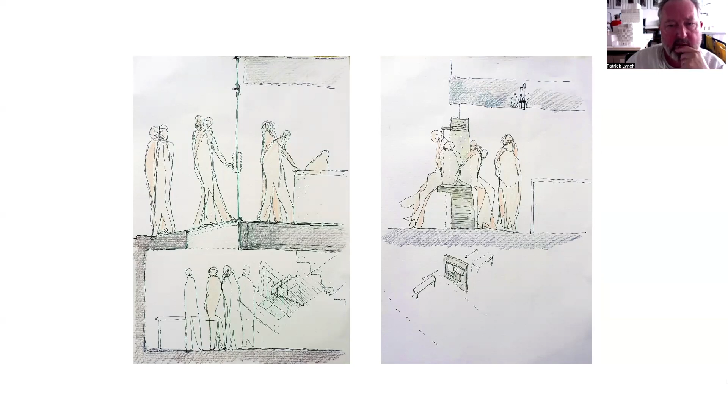So this is an example really of what the studio's like on any given day. A drawing of somebody sat in a niche in a wall with the evening sun coming in through the windows facing west, overlooking Christchurch, Spitalfields, a very early project, and the sound of the bells. And so the situated bodily character of this small gesture within the architecture was paramount early on. It's a drawing done much later. The project was built in 1999, I think. These two drawings also were done for the book Mimesis to illustrate a working method.

I think before the digital world, we didn't always scan things, and things were kind of stored away in boxes. On the left, a conversion of a Victorian warehouse building into a lawyer's office with a glass pavement illuminating a small meeting room in the old coal cellar. And on the right, another intervention into a warehouse building, both in Clerkenwell. I'm going to show you these two projects quickly.

Bristol Street, our first built project, I guess, that had a public face, is in the centre of the image you're looking at. Sat in between a Grade 2 listed Georgian house and listed Victorian workshops, in essence, the subdivision of this glass screen into three pieces echoes in a mimetic fashion, if you will, the scale and proportion of the domestic architecture either side of it, probably more like the Georgian than the Victorian.

And then the introduction of etched glass on the pavement, which folds and forms a kind of stall riser or ghost of a window ledge, introduces a rhythm and a scale which otherwise isn't required and could be all one piece of glass, but I think it transcends a technical problem and instead introduces a human dimension. And so the building is a kind of ghost or an echo of the Victorian and Georgian architecture.

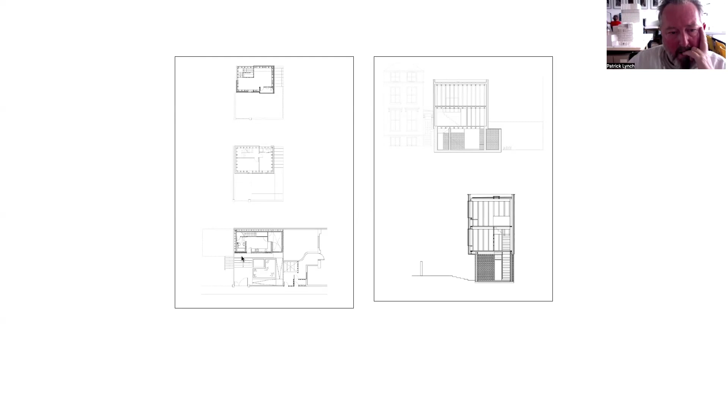The way we did it was to excavate slightly. You come in here, or there's a ramp down, to a brick ground, new white bricks and bricks painted white externally, on which sits an oak balloon frame, which was the client's desire.

They wanted a green oak frame, wanted something absolutely ancient, and effectively plywood used again to achieve this cantilever to get just enough space at first floor for two bedrooms and a shower room. The living room is situated on the top floor, the double height space here, and the balcony.

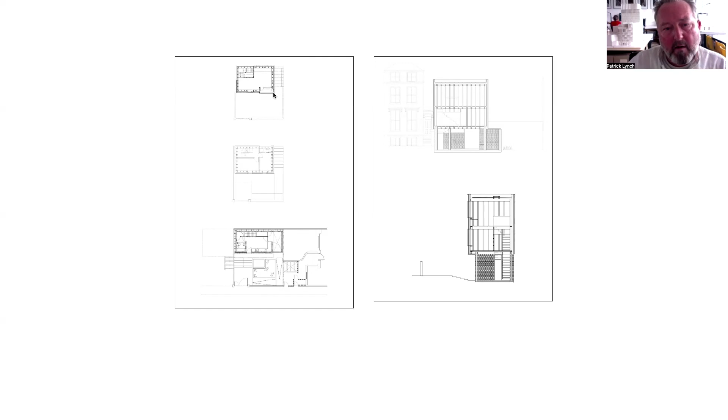It has this curious effect of, if you like, kind of ending the street in a way which the blank gables of the Victorian houses typically of London don't. They abut each other. And we were, I guess, keen to make a connection between the bodily scale of the 60 centimetres of the structural grid internally and the glazing, and the civic scale, so that the building is making a contribution to the street scene. It was all clad in vertical oak, a rain screen, effectively, where the boarding is.

It's weathered here. The windows don't open, so we avoid the kind of style issue of looky-likey Georgian or Victorian glass, but there's a ventilation panel. This is the kind of bricky lower floor, which is a heavily planted garden. And then as you rise up into the timber aspects of the house, the oak frame is complemented by, I think it's oak veneered MDF wall linings. And you start to see that this is the oak frame.

It's green oak frame, so it's not seasoned, which means it's highly reactive to the seasons, to the amount of moisture in the air. It's all held together with these things called tree nails. I like this picture because it shows there is depth, and there is an echo again of not just the typology but also the detail of the neighbouring buildings. There's views up at certain points. The back facade is etched glass to do with issues of visual amenity, i.e. privacy of the neighbours.

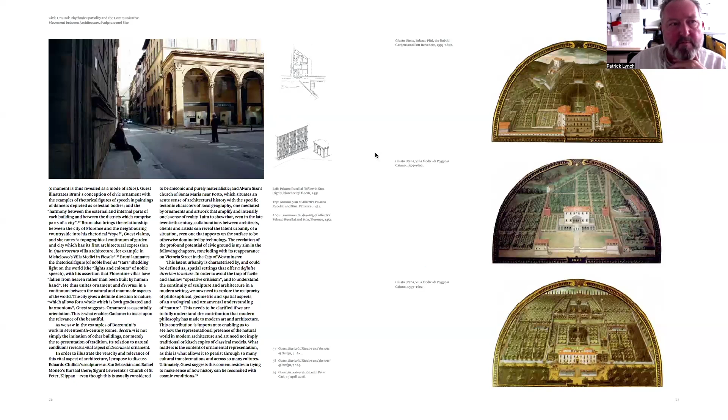And these are pages from Civic Ground, the PhD, and in essence, what Alberti said was that a really important thing that an architect can do is teach his client virtue, and that virtue, which is the moral philosophy, if you like, underlying design decisions, in this case meant persuading the client to buy a piece of land, to build a structure to provide shelter for people and for artisans, and for them to then watch the procession as it went past, was as important as completing the building for themselves.

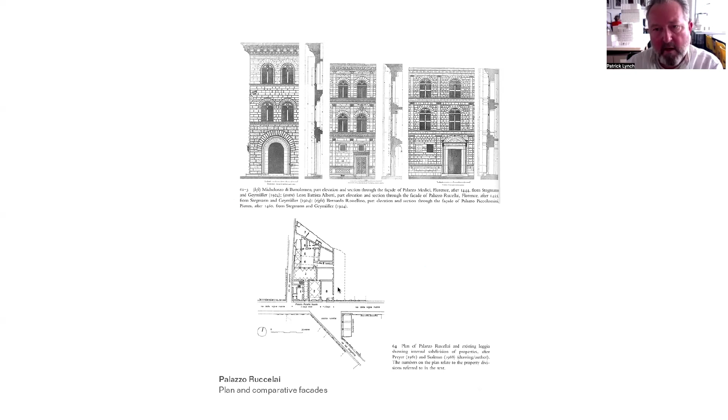And in fact, it's not complete. They didn't manage to buy this plot of land, and so the elevation isn't complete. But the way in which the building is able to participate in the city, nonetheless, was fulfilled.

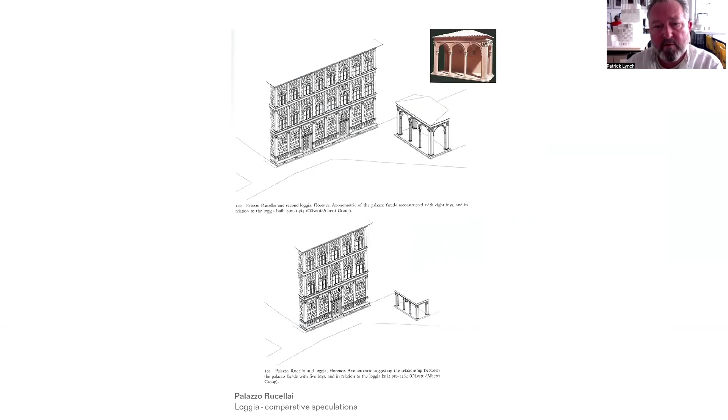And the particular festival that was being celebrated was the feast of Bacchus and Ariadne, where Ariadne, who's kind of left behind by Theseus, was taken up as a symbol of the proletariat of the city, as somebody who gets consolation in wine and song because they're brokenhearted.

So the building of the loggia was a way for the wealthy family to acknowledge their reliance upon the city to provide them with their well-being, and the need for them to recognise the presence of organised popular culture. That's in one way highly esoteric, but in essence, I suppose the message, Joseph would argue, I think, is that public space is as important as architecture, and specifically in the domestic sphere.

And one of the most recent things that we published is this book about Neave Brown, who famously said when he won the RIBA Gold Medal, we didn't think we were doing housing, we thought we were just making part of a city. And in the book Part of a City, which I wrote with David Porter, Neave Brown's ex-colleague, as you can see, we start with the Rykwert quote. I was trying to talk about the contribution that Brown had made,

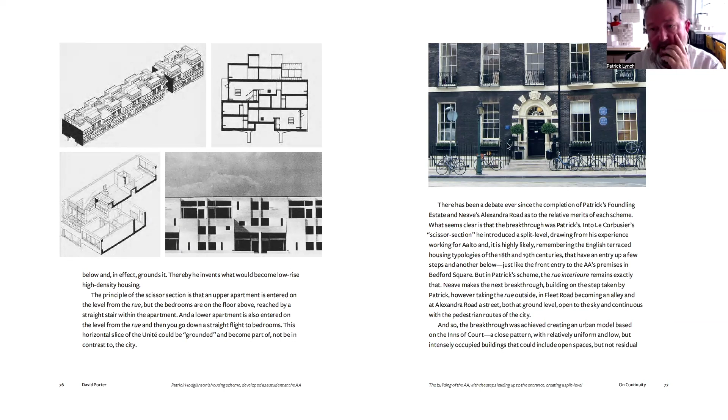And then those ideas evolved into the Foundling Estate or the Brunswick Centre in Bloomsbury, which were inspired by this 4th year project by Hodgkinson and by their own experience of Georgian architecture, i.e. being students in Bedford Square. And Neave Brown, interestingly, worked for Camden Council, but he was also allowed to teach. He was teaching at Princeton and at Cornell with Colin Rowe and others, and writing a lot. He was a very prolific and very good architecture critic.

And he, for example, thought that Lewis Mumford's distaste for the Georgian was kind of weird. Why should the fronts and the backs of buildings be the same? What is that duplicitous? And in essence, the early projects that Neave Brown began to build for himself and the Hopkins and their friends, this row of concrete, effectively party wall houses in Winscombe Street in Camden, has a kind of mixture of discrete elements. Either the ground floor can be accessed directly from the street, can be rented out, or teenage children can be there. But the garden is communal at the back. So there's a kind of anonymity.

And Brown was influenced by Atelier 5, the Halen housing. So there's, I suppose Sandy Wilson would call it the other tradition. There was an emerging typological reference to pre-existing patterns of habitation, both in terms of dwelling and architecture, but also in terms of the relationship between private space, semi-private space, semi-public space, and public space, that informed then Alexandra Road,

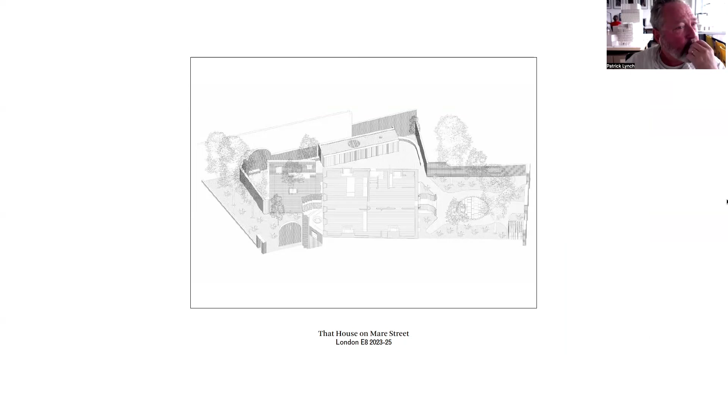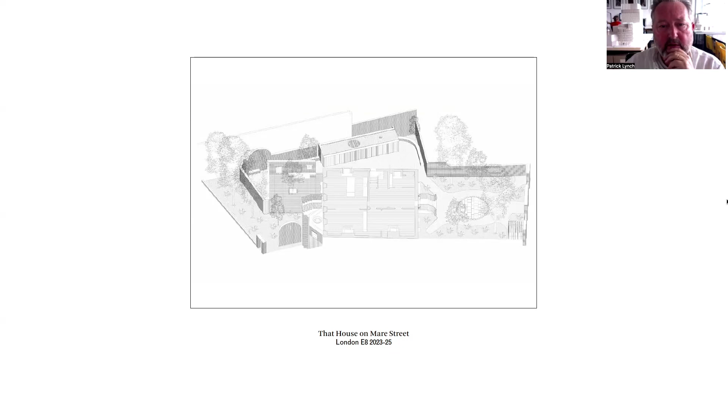Anyway, so the structure of what I'm going to talk to you about now is evolving this domestic architecture. There's a house which is still on site on Mare Street in Hackney. Our interventions, working with Jo Bernstein, the landscape designer, have been a series of gardens and furniture items in the gardens and in the house. The house used to extend to the depth of the plot, but this is London Fields, this is Mare Street, it's north, south. It was built in 1697 for a Flemish merchant.

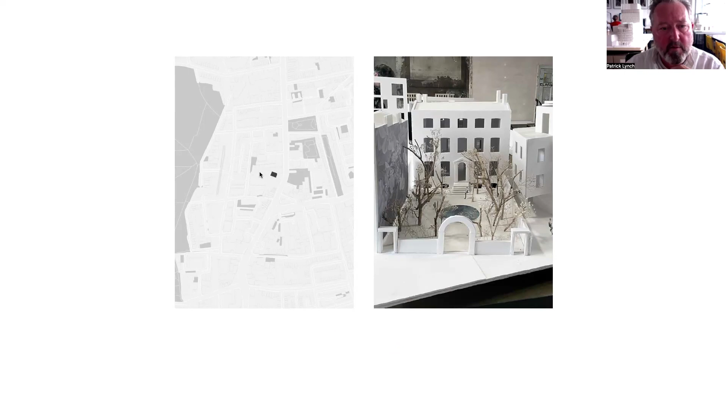It's a cube in plan and in section, and it has a square garden in front of it. Recently, a developer bought it, turned it into an office, and thus got consent to build housing very close to it in the rear. And therefore, our task has been to try and mediate between the overlooking issues of the new apartments and our client, who are a couple with a family, 3 children.

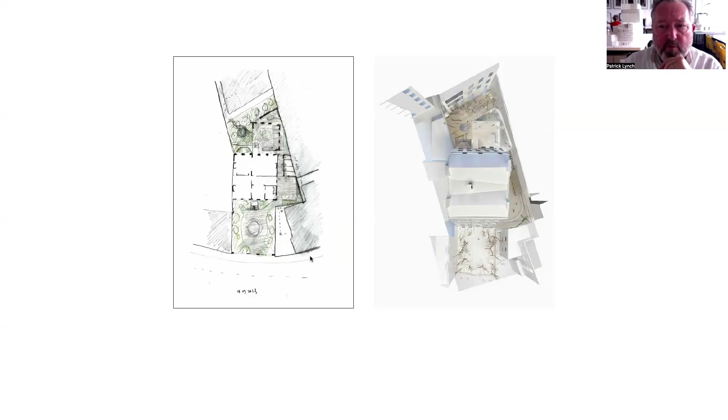The brief includes an art centre in the lower ground floor, and so a very formal garden at the front for those activities to spill out into festivals, performances, etc. And then a much more intimate garden at the rear. And in essence, what we've done is create a kind of fictional recreation of ruins of things that we know were there.

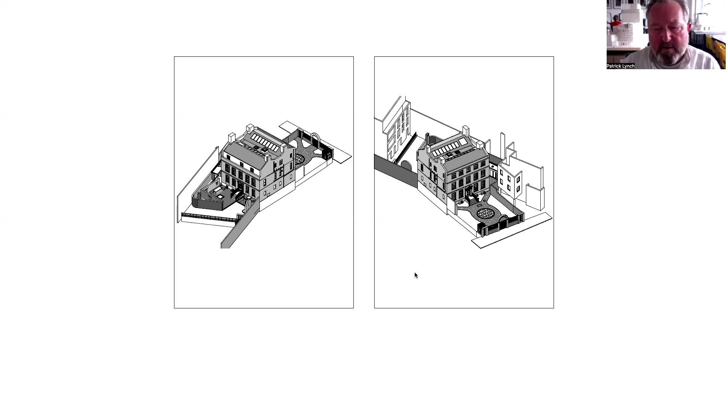So at various points, the house had operated as a working men's club, before that as a women's refuge. Elizabeth Fry operated out of this building. And so we know that there were washhouses and rooms where people were learning to become domestic servants. And so we've created a kind of fictive narrative of ruins of those elements in the garden.

And then in the house, tried to do very, very little to the existing fabric. So there's a mixture of new elements placed in and managed deterioration, I guess, or kind of ruined character. We've introduced a new staircase in the position where historical research suggests there was a second staircase, and new timber panelling, which allows a kind of enfilade plan to occur. So you can close down these rooms.

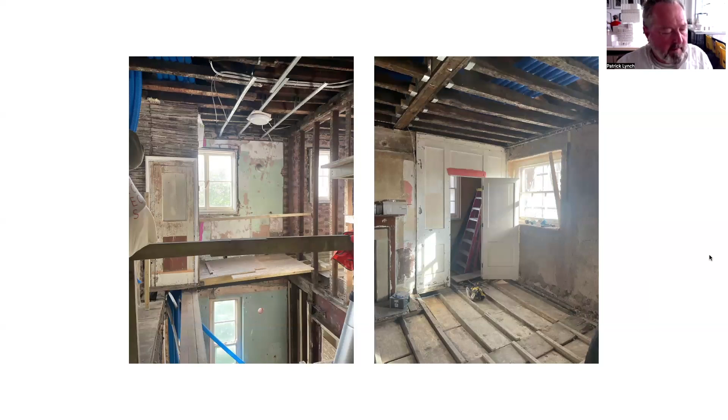This is a music room looking onto the second stair in the hallway. Beyond is a kitchen, dining, living room, and then at first floor, master bedroom and a living room. So that the house can both operate as a kind of an intimate space, but also as for public use. By which I mean where the art centre and the extremely gregarious character of our clients kind of allow the building to have both an intimate bodily scale and a kind of worldly connection.

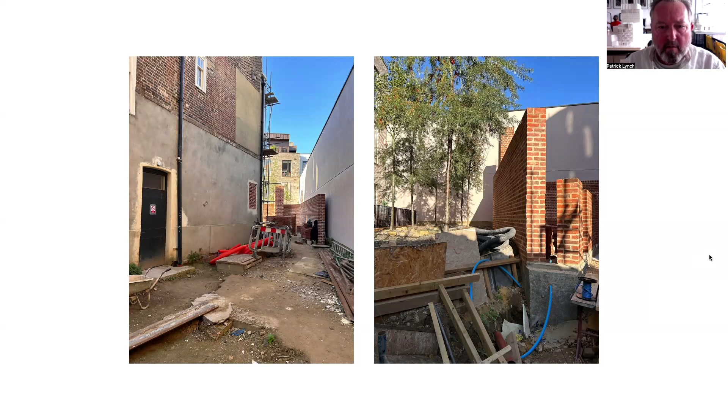The brick walls at the back are, they're kind of fictive. They're kind of ruins. Their purpose is to, along with the very tall trees that we planted, disguise the neighbours, but also to create an intense sense of intimacy. So when you sit within the thickness of the walls on a bench and look south, you're conscious of this oak tree in the neighbour's garden, and there's water coming in to the pond, and there's a chimney, a barbecue.

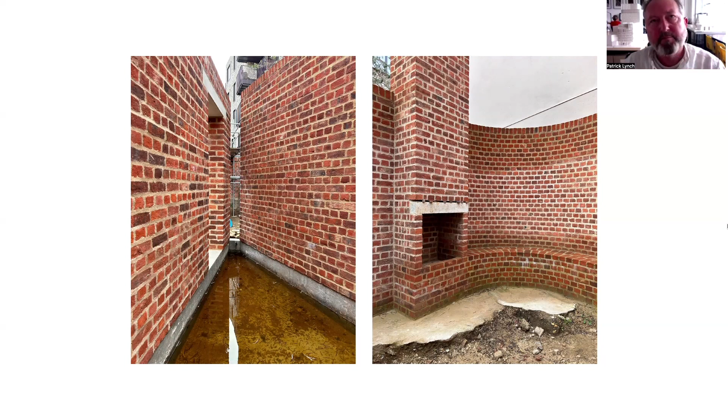So it's extremely elemental architecture and very bodily, and an attempt to introduce a kind of new layer, by which I mean, you can do the experiment now in the room you're in. If you look at your finger, you can't look at the screen. If you look at the windows or whatever's on your windowsill, you can't focus on anything outside your window. The camera can, but the human eye can't.

So if you place things into the foreground of people's vision, they aren't aware of the background. The background becomes background. Disappears, blurs, and thus you have an intense intimacy, which allows you to be cheek by jowl with the rest of the city.

I think there's also something going on about figurative elements in architecture, by which I mean chimneys and things that are kind of bodily, but also have a kind of linguistic content, whereby the eye recognises that even if you're not having a barbecue, the chimney gives it the character of a place. So it's not just a garden. It's not just to do with scale as size. It has to do with the intensity of one's experience of something and how the mind reads it as a place for potential inhabitation and occupation.

These are photographs by our son, Valentine, who's about to start studying architecture. And the project is a kind of, I guess, a sort of unity of the arts, a kind of Baroque project whereby the garden that Joe Bernstein is planting is complemented by this wonderful mural by Thiago Mazza, which is moving back and forth from plant species that Joe's planting in the garden, plant species that historically would have been in the garden, and

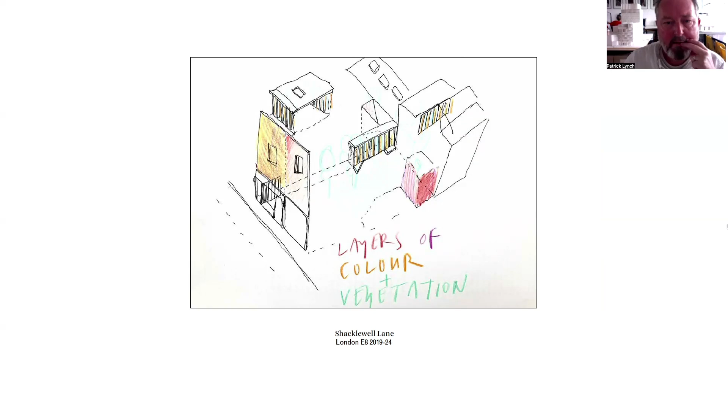Another project, which is similarly kind of hybrid between domestic and civic, if you like, is a project not that far away, also in Hackney and Dalston. Shacklewell Lane has a green on it, which historically was used for livestock, for grazing cattle, and our clients bought the property in the late 90s, and it previously had been a dairy and a milking parlour and a shop, and the building next door was a butcher's.

So it's quite a deep site. This was the milking parlour, this was the dairy, and this was a shop, and there's a small courtyard. And they, over the years, got married, had kids, but were kind of schlepping back and forth in their pajamas and slippers. There's no connection between the animal architecture at the rear, if you will, and the domestic at the front. And there was this courtyard which was effectively formed by the shape of cows moving through, a small recording studio, and

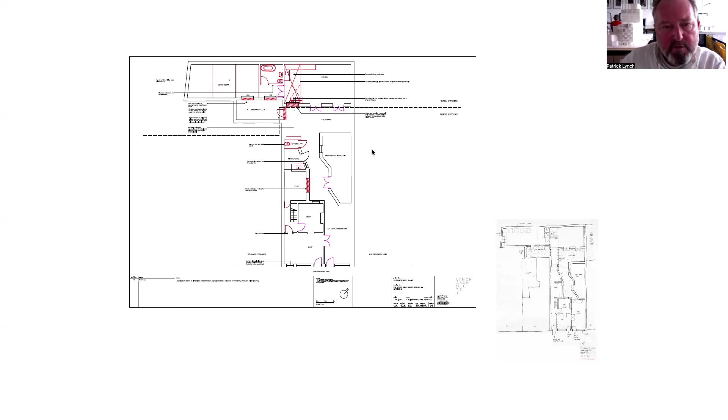what we proposed to do was to remove the roof over this space and introduce some windows, thus creating a new courtyard, remove some ad hoc amendments that had been added at some points over the last decades, and remove this external WC, and then just build this much new construction, 5 square meters, I think, of a glass corridor link connecting the front to the back for the first time.

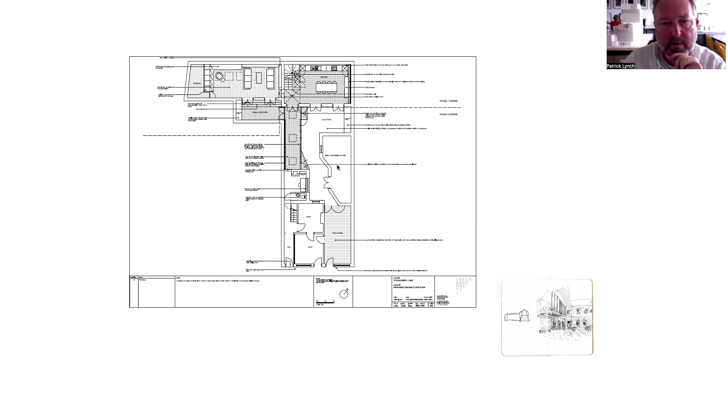This steps, because historically there would be quite a lot of effluents and spilt milk and stuff that needed to be cleaned, and so the whole site effectively is stepping down to drainage here, which effectively gives us a kind of motif of a stepping ground. There's a shop, the client sells furniture, and a yoga studio. So the domestic entrance is here. Upstairs is 3 bedrooms, and then we process through the last corridor to the living room and the kitchen, and then above here there's another bedroom, and the music recording studio remains, and a new courtyard.

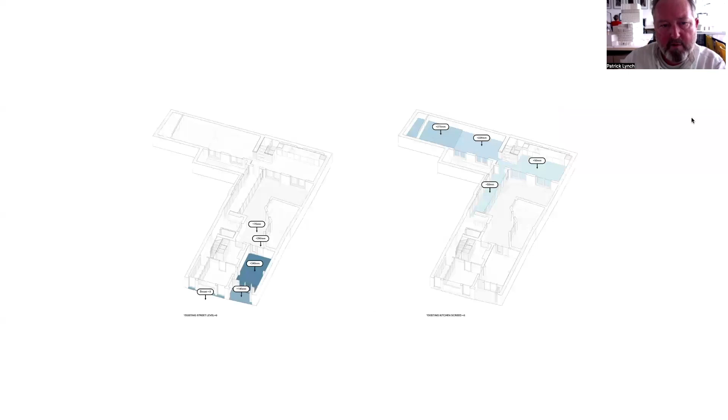hardwood timber elements. The axo shows how the ground is stepping, and the idea was to try to do something that signified its new use, its new identity, that was sympathetic to the earth tones of the neighbouring buildings, the ubiquitous brick of London, and to introduce new timber elements, a screen that opens to allow the yoga studio to be accessed. This is the door to the shop, and this is the door to the flat. New windows, again, fixed panel with an opening vent to the side, which avoids stylistic questions of Georgian or Victorian.

And then as you move through the house, the introduction of a new ground made of terrazzo, which is similar to the cobbles in the courtyard, I think, fair to say, but it's a sophisticated environmental device, underfloor heating, there's lots and lots of insulation. So there's a kind of material continuity between inside and out. It's a slightly wider corridor, creating a gallery space. A new stair up to the first floor bedroom above the kitchen.

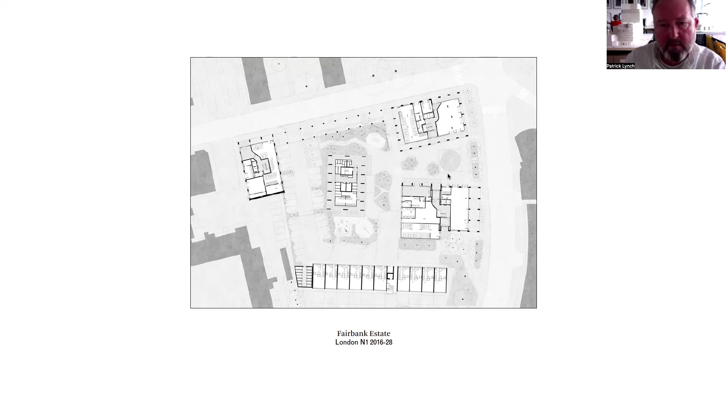One assumed that it was bombing that had led to the destruction of large parts of Victorian domestic streetscape, but actually it wasn't. It was the planners. They decided to get rid of what would now be listed housing stock, and to build a tower, to create a sunken basement level, literally, the road engineers are in charge, and a 3-story car park structure to the street.

There's a car park between you and the tower, and in fact, the car park structure, in order to ventilate it, literally creates a rift between the existing streetscape and the site, which is further elaborated upon by the creation of a kind of shallow bridge that further isolates the tower in a moat of cars and road engineering.

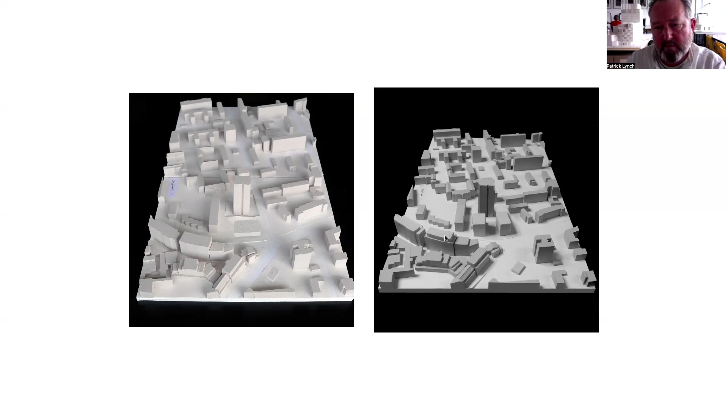Our solution has been to create 3 new blocks, which are parallel to Murray Grove here, and in this case perpendicular to East Road and New North Road. The result being a kind of natural perspective, focusing on, for the first time, the entrance to the existing tower building, and a building here which accompanies a 90s building here, creating a new route into this estate.

This is Hoxton Street here, so if you're coming from Hoxton Street, that's the main entrance to the site. If you're coming from Old Street, there's an approach from the south. This block is fully social rent. This is fully market, and this is intermediate housing.

Yeah, it's, I suppose, modest, anonymous background architecture in the way in which Neave Brown was attempting to make, in his words, a kind of civic anonymity. The architecture is, what's the word I'm looking for? Economic, modest. Everybody has corner balconies. This is the west building to the back of the existing tower. That's the approach I mentioned into the estate.

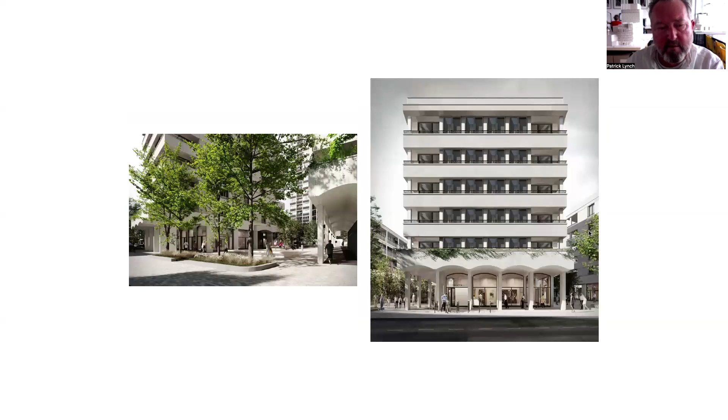But the delight, I guess, comes from the integration and the introduction of a new civic ground. So in complete and utter contrast to the car-infested antisocial territory that exists currently, a series of colonnades and porticos which create layers of occupation both within the facade and within the groundscape. It's a stage, lots of planting. There will be retail use at ground floor.

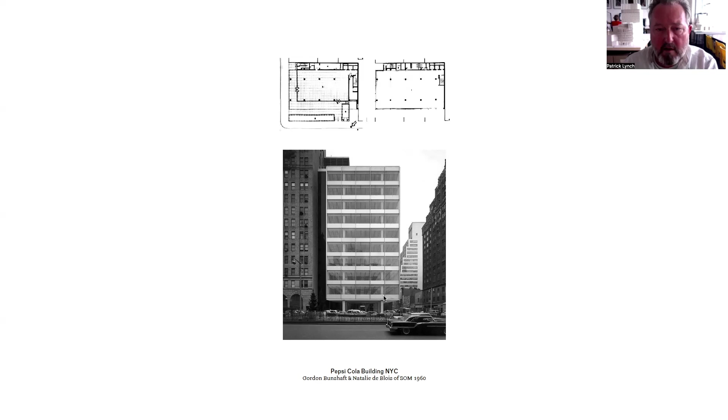It has an open corner, which is here, so you can move through the plan at ground floor. Has incredible elegance and simplicity, which comes alive at night. I would argue very, very urbane architecture, totally suited to its purpose and to its place.

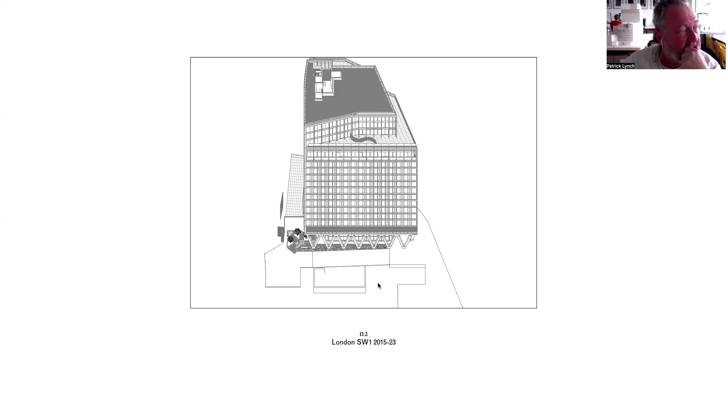It's subsequently been extended. And the reason I'm mentioning that is because what we've ended up doing, which is, I suppose, inevitable if you're an architect in London, which is a city made of, like most cities, of offices and housing. Been working for almost 20 years on Victoria Street, doing a series of office buildings and apartment buildings, which I'm going to show you now.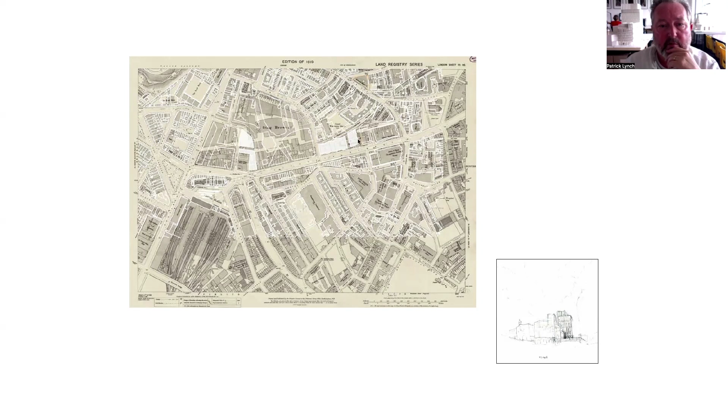And hopefully the theme of the worldly body is clear in the way in which the architecture responds to the setting of the train station, the Catholic cathedral, the town hall, in a way that seeks to ground these new buildings that we've created into a historical streetscape in the way in which some of the other buildings that were built in the 20th century and preceding us haven't sought to ground the architecture in a public realm, and also which lack a bodily scale.

This is N2, this is N3, this is the building called the Zig Zag building, and this is Kingsgate. They were finished about a decade ago. Previously, there had been fragments of historic housing, all of which was demolished in order to build a new ticket hall for the Victoria line, so that you don't have to exit the tube through the train station. You can now exit on the north side of Victoria Street.

A very, very tall tower built in the 60s, if you like, completely out of scale with the streetscape. And our task, in essence, was to try to, I think, in a positive and creative way, critique the problems of this modernist landscape. This building here is cheek by jowl with Hawksmoor's new facade to Westminster Abbey.

This is a photograph that David Grandorge took for us as part of our entrance to the Venice Biennale in 2012, when the building was just going on site. Kingsgate 6 was just going on site, looking at the rich hinterland of Victorian architecture and the rather mute and barren foreground of the street.

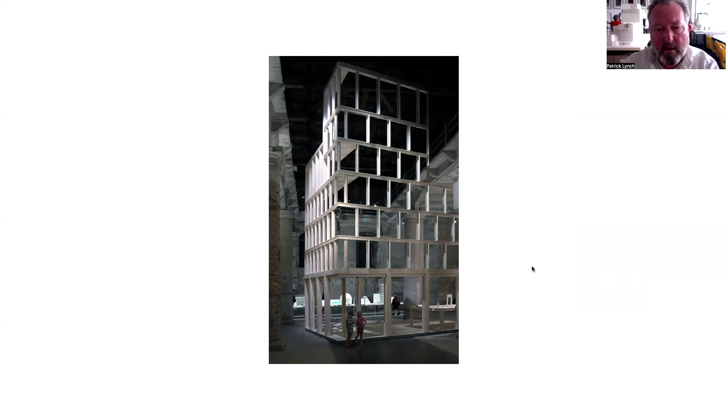This is the contribution that we made. We got a 1/3 scale facade out of CLT in the Corderia of the Arsenale, exhibited alongside Hopkins and Eric Parry. That's the facade that we built 1/3 scale. We started off getting this site, no, actually this site through competition, and then this site, and then these buildings, and then this building, and this, the first one we got planning consent for, weirdly, is going to be the last one to be built.

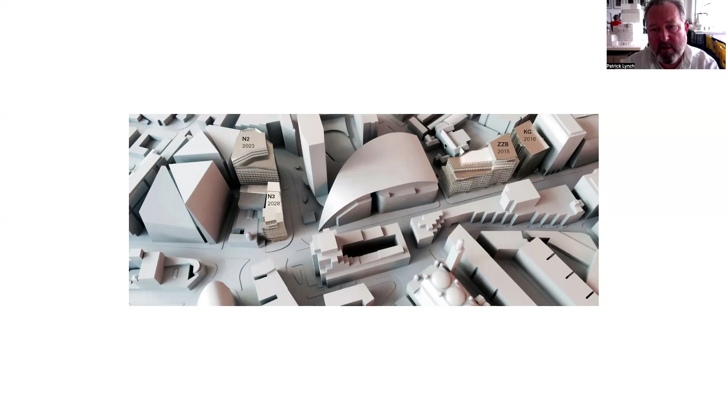There's a new pedestrian route introduced that runs along the back of Victoria Street, so there's a kind of quiet zone, as well as, I suppose, an intensified, I would argue, civic presence to the foreground. This is City Hall. This is Bentley's Roman Catholic Cathedral. Originally, this composition of the town hall had two wings like this, completely blocking progress north-south, creating a service zone for cars at the back and a very bleak pedestrian experience at the front.

And in essence, the competition asked for housing and offices, and we've effectively taken the open grain, rather, is probably a better word, of mansion block housing that Bentley built in order to pay for the construction of the cathedral, and placed it here next to the town hall, on the same orientation, and then using mirror symmetry through the centre of the public space between them, created a series of blocks that step down towards the cathedral, which obviously is the major heritage asset in this part of Victoria Street. The town hall's very big. It's kind of nondescript architecturally.

And then the difference between the two gives us a repetitive footprint, I suppose, a genius loci, I would potentially call it here, of species of spaces that repeat across the site. Simultaneously, we were looking at how do we make a south-facing facade open. In essence, the mansion blocks that Bentley built are derived from the London plan of the 1750s, which limited the size of plots to around about 20-24 metres.

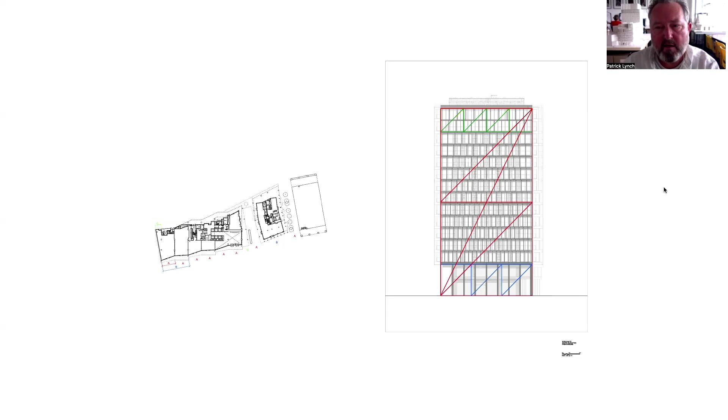And then, of course, this is the imposition of, if you like, the kind of learned Corbusian, Colin Rowe analysis of Palladio and then Corb's architecture to try to create a kind of civic order to the architecture, so it has a kind of perfectibility, ideal paradigmatic quality.

And this is a drawing of the city as a series of rooms. This is inside the cathedral, the forecourt of the train station, and so this kind of inversion of object and ground, or rather attempt to reconcile them, where the spaces between the buildings have a scale and a presence.

This is the space between the two buildings, a very, very large model we made for public consultation in 2010. And then this is a photograph of Kingsgate Walk, which is a new public space in between City Hall and the residential building, with an artwork by Rut Blees Luxemburg.

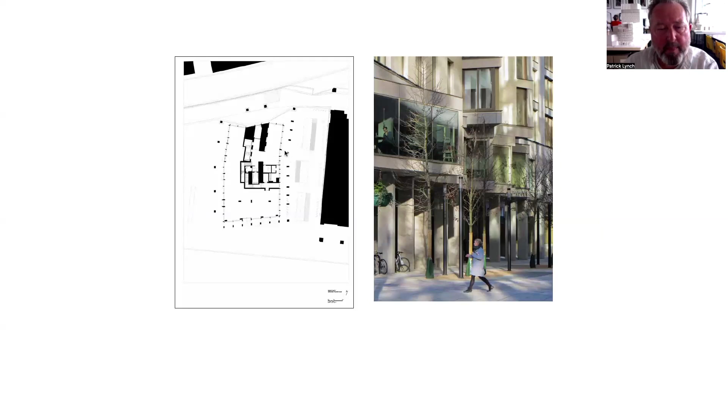This is the space between the two buildings, so it's lots of restaurants and bars and public seating. I suppose you could say highly civic by being so close to the cathedral and the town hall. And this is the entrance to the residential building. So that column's here. And this, in contrast, is a much quieter, more domestic and intimate space.

When we contemplated removing the existing building, the planners realised that there would be a scar of brickwork along the western gable of the town hall. And we were tasked with coming up with a solution. This photograph is looking from here, and it shows the change in scale from the double height giant order columns that frame the entrance to the restaurant on Victoria Street to a more intimate domestic scale.

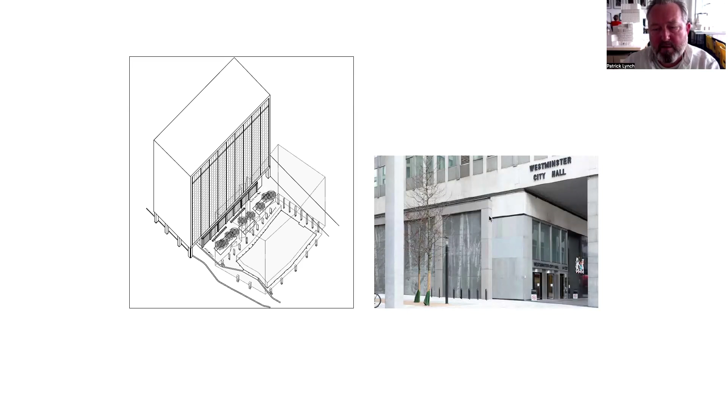This is an axonometric of Kingsgate Walk. And so the solution to the problem of what we were going to do for the bare facade was to, in a sympathetic way, elaborate on the brutalist concrete architecture of the Town Hall, but to introduce a narrative about the sustainability of the architecture, i.e. its facades which limit the need for fossil fuel use.

And Rut came up with the idea of what's now called the Silver Forest, whereby the texture of the GRC concrete panels and the stone and the trees have a kind of mimetic character, if you like, both in terms of touch and in terms of images. And the point when you enter the building is the only one where you can see into the forest. Otherwise, there's a kind of noise and distraction and chaos.

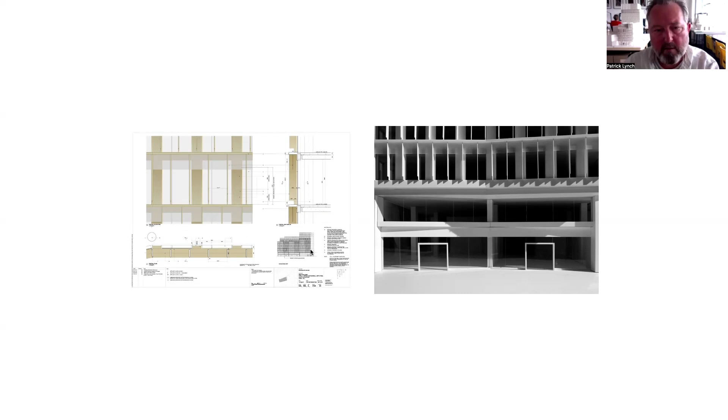This is the facade of the office building. It has solar fins disconnected from the glass, so they get hot, but the glass doesn't get hot. It's a wall building; it's low towards the cathedral and steps up higher towards the town hall. We felt it important to stop it looking like a slug, so we tried to introduce some vertical character. And so the fins get close together as they rise up the building, creating delight, I guess.

And they don't need to be as deep when they get closer together, because they would just be casting themselves into shadow. They're designed to deal with solar gain in the summer, not just when it's at the zenith facing south, but also in late morning and early afternoon. So it's dealing with the sun from the west and the east. And in essence, there are a series of windows, if you like. So the figure of the body reappears within a street otherwise made up of mute, glassy, scaleless facades.

The third element is what I call the doily, which is a piece of glass with a screen print of an onyx stone within it, and that deals with glare, but it also allows for the fact that in some of the spaces there are ceilings and in some there aren't, so you don't have a mismatch of that echoing across the facade. The facade opens; it can be used in mixed mode.

You can see the view towards the tower of, I think that's the Victoria Tower, it's not Big Ben, is it, of the Houses of Parliament. So the striated character of the vertical finials of the Gothic somehow seeped into my subconscious. The effect of placing this building at this angle, i.e. discontinuing the grain of mansion blocks to the south of Victoria Street, has been to open up for the first time a side entrance into the portico of City Hall.

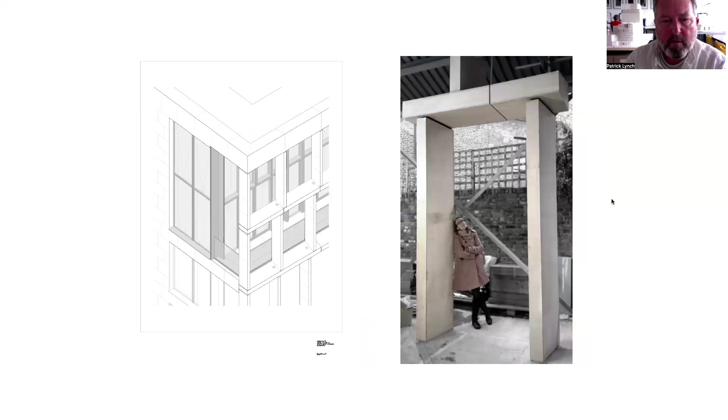This is the stone facade of Kingsgate, a load-bearing facade. There's enough of them at the lower level to provide privacy for people in their pajamas or wandering around watering their plants, and they invert the order of the office building. They get further apart as they go up, so you have better views once you get above this building, but there are still enough of them not to need fossil fuels, air conditioning to cool the building.

This is inside the loggia, if you will, at the top of the building, the view of the campanile of the cathedral. And in essence, what we're creating is a kind of anonymity. It allows all sorts of different types of occupation and furniture, mess, if you will, to coexist with an office building and the town hall. A kind of emphasis on the streetscape to introduce life into the city.

There's a huge amount of thought gone into the detail of the building, so you don't drop a glass off the building. The chamfer angle is there, it's a health and safety issue, if you will, but it also introduces a kind of tactile dimension. This is the ionic screen in the office building for glare, and then used for privacy in the apartments. A view up.

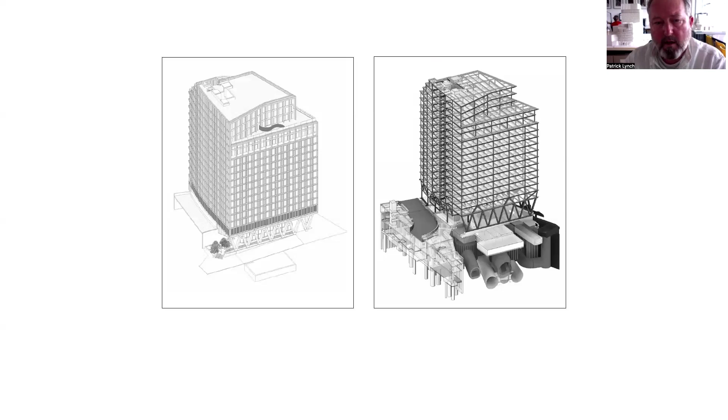The solution to this structurally was a huge grid of steel structure becoming a truss at ground floor, founded in only four points, which creates a kind of strange new typology of a colonnade. There's a difference in the site. It was 1.5 meters lower here than it is here.

We work with J&L Gibbons and Marf Landscape Architects, who we're working with on other projects. This is their wonderful solution. It's a disabled access ramp, but also some steps to get you up to the western entrance into the building, which becomes a kind of garden. I'll show you some photographs of that in a moment.

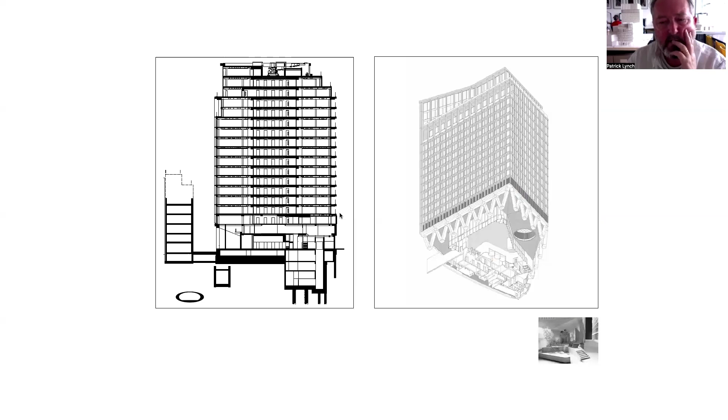It's effectively a kind of feat of high-tech engineering, this whole thing. It's a plant room at first floor, so the top of the building doesn't have plant. If you notice on the plan, there's this circle element here, which is an exclusion zone, effectively, for a cherry picker to lift up the manhole cover to gain access down into the tunnels in case the sewer ever flooded the tube line.

And that circular motif becomes a clue to the geometry of the plan and some of the elements within the architecture. It also allows air to be brought in to the plant room at first floor. It's a simple floor plate, core here, the only place we could found it.

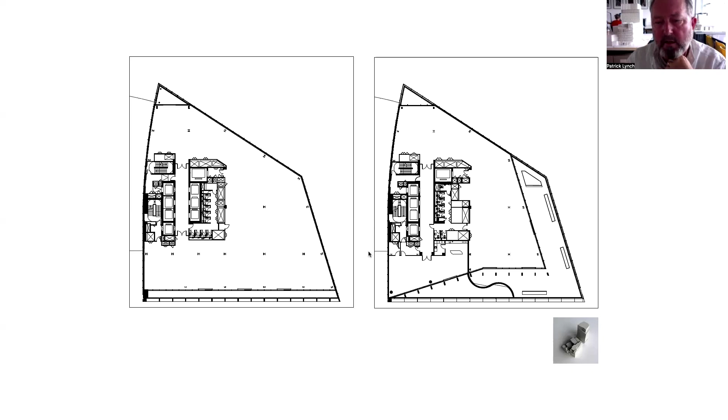Reception area with a balcony overlooking Buckingham Palace to the rear, to the northwest. Area to be cellularized, open plan at the front. This is level 13, which has a double height loggia. And then level 15 was a club room or party room for the occupants of the building.

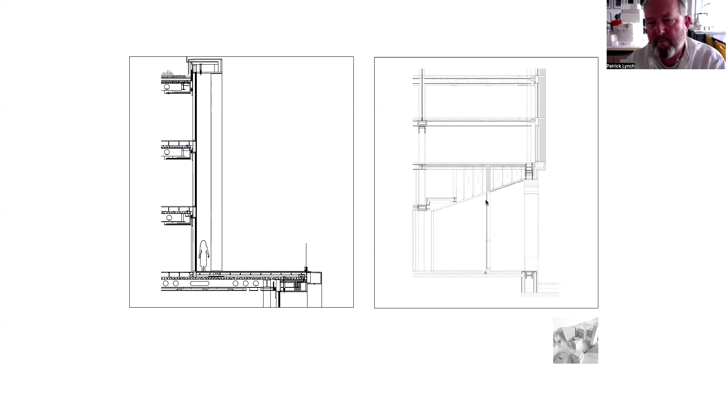This is demised as by a tenant, and then a timber screen. That's level 13, but that's level 15, a triple height space, and then the ground floor entrance. The vapor barrier or building line is set back from the colonnade, which I'll talk to you about in a moment.

I just want to show you these images because this is a CGI, this is a photograph, and what we learned from working with Richard Coleman and Francis Golding, townscape specialists, was I guess the kind of picturesque method that Gordon Cullen talks about, that Pevsner talks about in Oxford, that the composition of buildings can be understood in a painterly manner.

So, for example, the pub, the Duke of York, Frank Matcham's beautiful Victoria Palace Theatre has now a backdrop which mediates in scale between the very, very large buildings and the, I suppose, domestic. This is, you know, Georgian housing, but then become analogically a palazzo type, i.e. the Victoria Palace Theatre.

And then now, when viewed from the proscenium gateway of Victoria Station as you enter the city from the southeast of England, there is, according to Giancarlo Floridi, the Italian architect and critic, now a palpable sense of a piazza in front of the train station, simply caused by the layering of these facades,

whereby the figurative elements of a grand arch, a middle layer, and a cupola echo in a slightly abstracted manner, and the early office building typology of having a base, a middle, and a top in the image of a grand palazzo that Adler and Sullivan were building in America. It is resuscitated to create a middle ground of city.

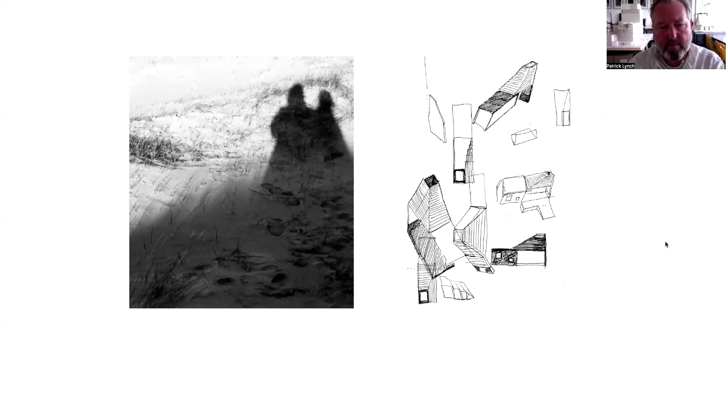This is the long beach at Holkham, and this is the sea wall that the Dutch built, which separates the salt water from the fresh water, and thus created the possibility of the extension of arable agricultural land. And the house kind of sits at the edge of that. And going there with Claudia in 2001 to visit our client Alison Mitchell in her bungalow, we were struck by the huge expanse of the horizon and the strange way in which our shadows created some kind of scale.

That's the bungalow. You had to walk around like this to the side to enter it, and they had a coal store facing north, so there was no view of the marsh. It paid no heed to the solar orientation, the warmth of the sun. And in essence, what we did was add a front extension and add a back extension.

And then in 2008, we went back and we added a carport, a store for the oil tank for the central heating, and a studio for a second set of clients. And you effectively arrive here, go up a shallow ramp into a small room for dyeing clothes. The original client was a textile artist, and a boot room through into the kitchen.

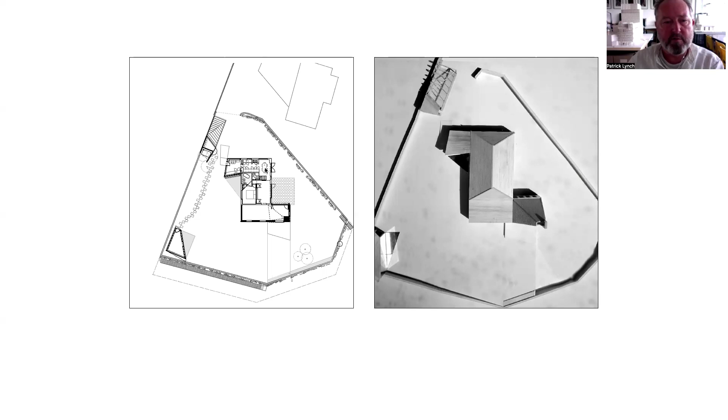And then at this moment here, you start to become aware from the dining table of a view out of the marsh. And so you've gone from being cramped in a car to beginning to come in carrying things, putting them down, and then becoming more upright, and then being confronted with a space that rises vertically quite dramatically, with a roof light that brings the sky into play, and a chimney.

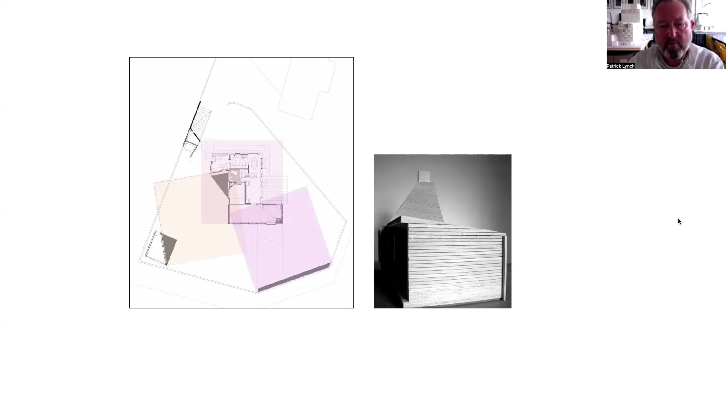The geometry of the pieces are fragmentary but harmonious, I would guess you could say, or they relate to each other in a way that isn't obvious but becomes more obvious as you move around. A kind of abstraction of local vernacular architecture. Very, very tall chimney with a roof light and large glass sliding doors that mean that in essence you're kind of camping in a tent at the edge of the wilderness. This is the marsh beyond a pond to stop you falling into the marsh.

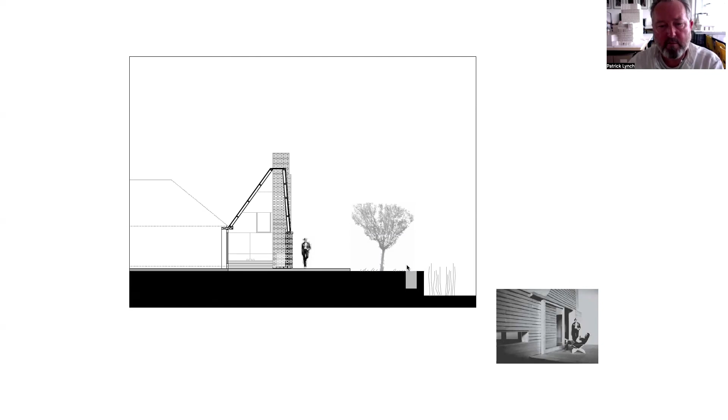So suddenly that ad hoc or willy-nilly kind of collection of bungalows have the character of a place. This is a view from the coast road to the west, the tall chimney in the afternoon sunlight.

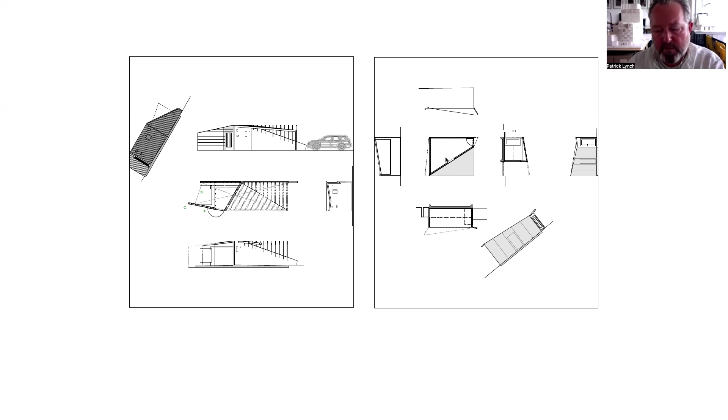The carport, a kind of architecture beginning at the scale of the chassis of a car, a low concrete wall that rises to enclose the oil tank, and then literally a room with a view, just a door that expands to give you a view of the marsh, a pond, a mirrored wall with a window in it, which means that at dusk, when the lights come on, you're suddenly visible, so that's the time to return to the collective.

This is as you're arriving, the carport, studio, the entrance. Entering into the boot room, into the kitchen. And this is the 7.5 metre tall space in the living room, light falling from above, and the fire. There's underfloor heating in the building, so there's no need for a fire in technical terms, but I think there is in psychological terms in this location.

A figure that mediates, if you like, between the sky and the horizon, giving a sense of human occupation. And then literally the use of reflective materials to enhance your experience of the natural world. This is the master bedroom, and here is the bathroom, and actually the mirrored wall is hiding a boiler. That's the studio, its mirrored wall. This is the room with the view I mentioned.

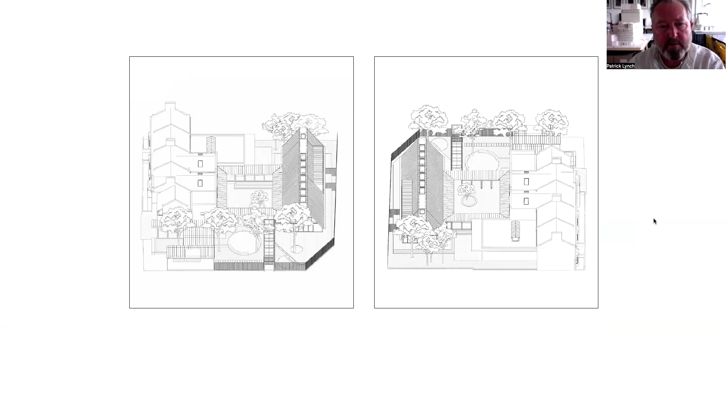becoming a big house. So a room for children that's both recognisably domestic, and through the creation of a series of courtyard gardens, something for people who come from all over the world and live locally and make use of these local government services to have a sense of communal ownership of the big house, the courtyard being the thing, I guess, that kind of mediates between the scale of the domestic realm, the private realm, and something shared.

Last couple of projects, barn in Essex, which is here, which is a threshing barn from the 17th century, piggery, and stable.

So a kind of little community of buildings. Nearby, there are these beautiful black painted barns all over East Anglia, kind of mute, silent, modest, very reserved, but with a charged void, if you like, as the Smithsons might say, kind of spaces between them of potential.

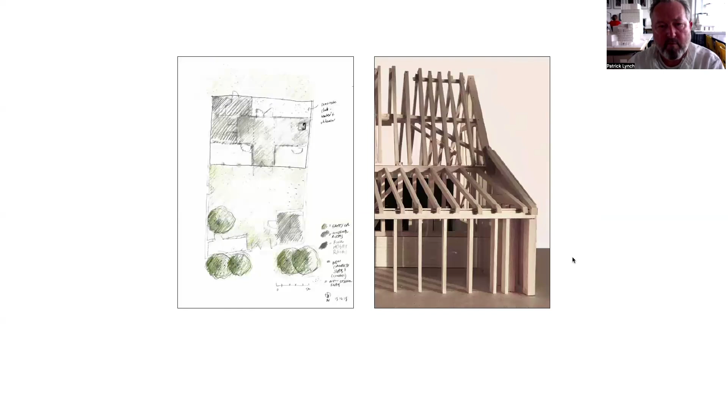It's our first site visit. And it struck me very powerfully that we needed to retain a sense of its agricultural character and its slightly strange otherness of buildings not designed for humans but for animals. And that we should try not to do a barn conversion that would destroy that strangeness, its vast spaces and repetitive materials. And we should try, through the introduction of new landscape elements and new pieces of furniture, to retain the relationship between landscape and buildings,

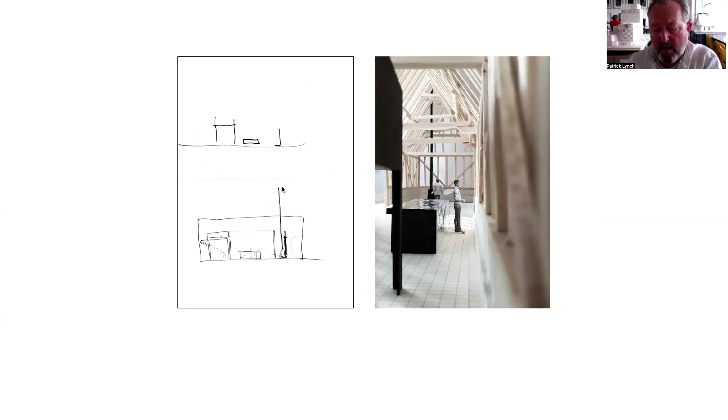with large-scale models. And so in essence what we realised was that to make it function for humans, we needed fire, we needed water, and we needed a space of reflection, a space to work. The client is a landscape designer, Joan Bernstein, who I mentioned before, that we've been working with on other projects. This is her study, this is the kitchen.

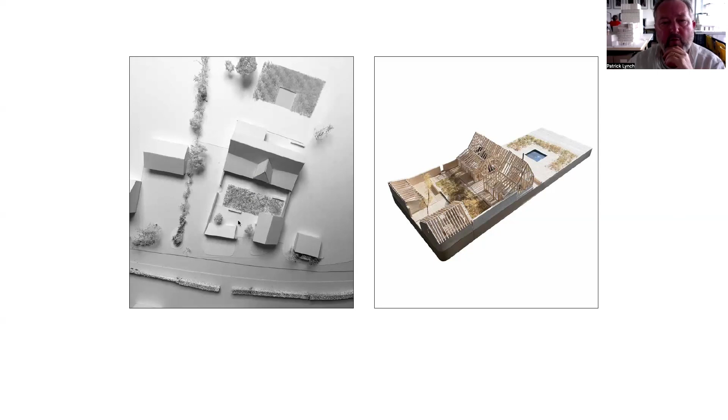Her plan was to try to build a garden. In essence, that was the main motivating factor. Because it had a courtyard, it lends itself to the creation of two different types of gardens. One that is more verdant and benefits from the reflected warmth of the brickwork walls. And then one overlooking the agricultural land, which is a wildlife garden. So it's as if the field has come into the domestic territory.

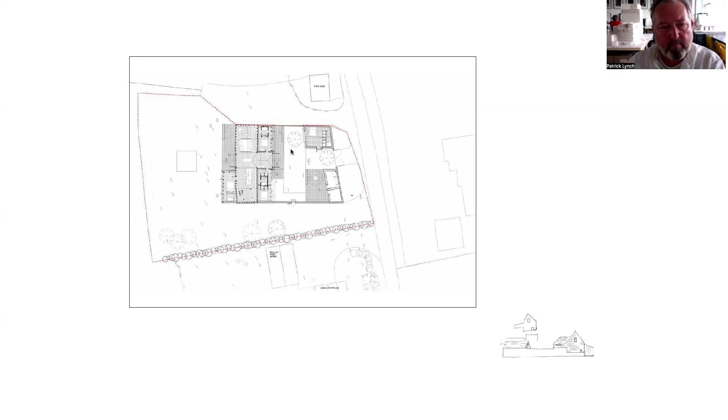So these plans are a bit blurry. That's the ground floor. That's the first floor plan. This is the study I mentioned. You'll notice there's an offset. The barn is on a north, south, east, west orientation, and that's because a threshing barn worked through the threshing of corn through the east and the west winds flowing through the building. So it's on cardinal orientation, a bit like a church. But the architecture adjusts itself to the ancient field pattern, to the roads.

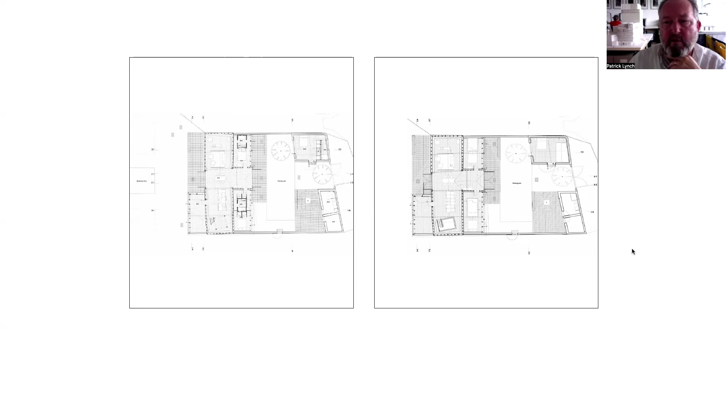And so we realised there were three black objects that we were going to place into the hall, as it were, of the barn. Three black objects, and this one would respond intimately to the kink in the wall here. And so at the microcosmic scale, the macrocosmic sense of there being three rather enigmatic black objects is repeated in the introduction of three rather enigmatic black objects into the interior.

The whole building was renovated. The roof came off. The structure was fixed by a wonderful man called Joe Bisham. And then a new floor was made. New brick dwarf walls were made, insulating the building. This is a section through the bathroom pod. And we work very much back and forth on hand drawings and CAD drawings.

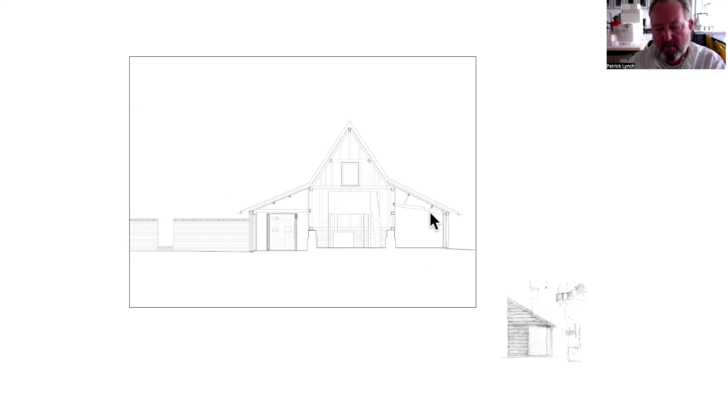This is the view as you come. If you come from the train station, you walk over the fields, you arrive at this enigmatic object. The new intervention really is limited to the new unpainted oak windows. A new window here, cut here to reveal the structure and to give a view west. A building that can close and can open, and in so doing it reveals itself, reveals its structure. The wobbly roof is put back, so it has a sense of something very old.

And of new things placed into it, so that human occupation is kind of temporary, if you will. It's still a barn primarily. It's just being occupied by human beings in a kind of provisional manner. So there's no mezzanine level, there's no plasterboard, there's no suburbanization occurring to the architecture. So we like to call it a barn non-conversion, if you like.

So you see literally all periods of history, 20th century additions, original parts of the structure. There's no hierarchy, there's no snobbery about that. They're all part of history.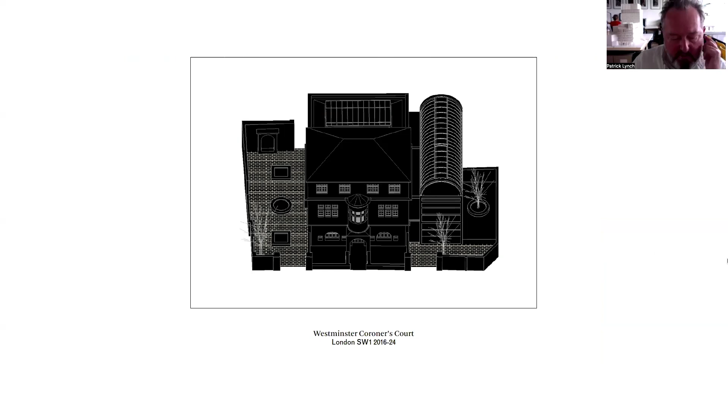Which brings me to the final project, which I guess deals with the most explicit kind of cosmic dimension of architecture, which is death and memory and meaning. And in a very intense way, a coroner's court is a type of courthouse, obviously, but it's one where inquests are held to determine the cause of death, be it suicide, murder, accident, etc.

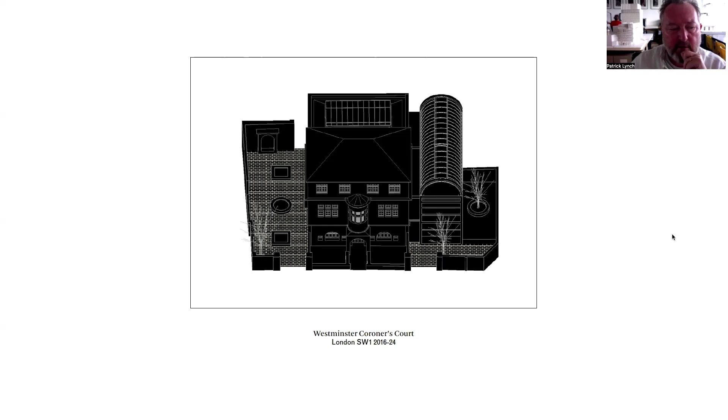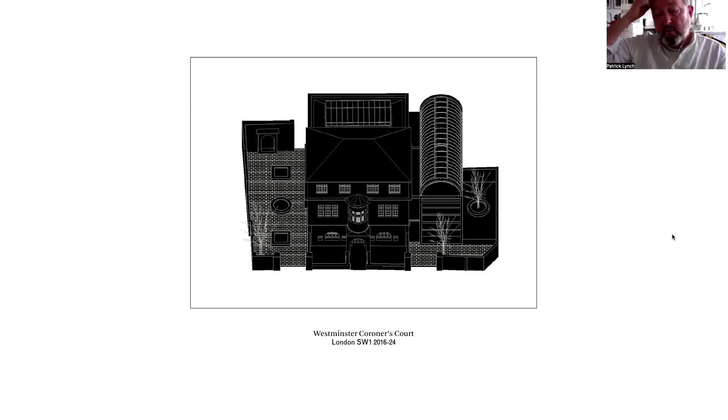They were introduced in the middle of the 19th century as part of the municipal acts in England to deal with the increasing secularization of the English state. Previously, the Church of England, with the hegemonic structure of the monarchy and the crown, was the place where you get married and register births and deaths, etc. With a growing population and a move towards secularization, town halls were built through the Metropolitan Acts and Coroner's Courts.

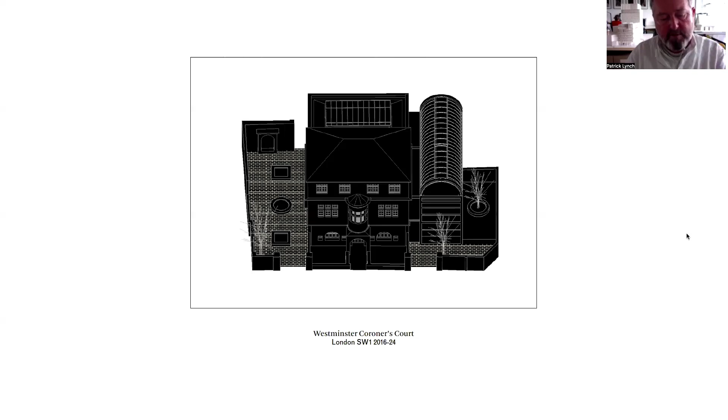And Westminster's Coroner's Court is unusual in that in everyday use it also services 3 other London boroughs, the quotidian everyday deaths of daily life, but it's also very close to the centre of Westminster as the seat of national government, and is also used for the Grenfell fire inquest. The bodies were brought here, terrorist attacks on Westminster Bridge and London Bridge, that kind of thing.

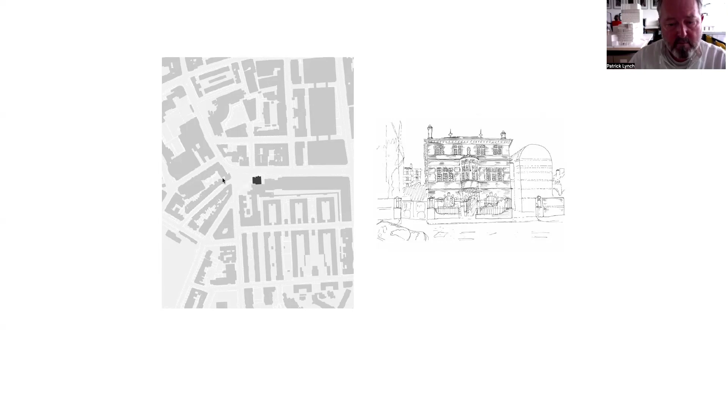The building is centrally organised. There's a corridor running through the middle of the plan. It has a small arch, a window seat at the first floor. We built in 2018 a garden of remembrance, and then finished last year a garden of reflection and an extension. The land to the west will never be built upon because it's got a disaster mortuary. So during COVID, it was lined with tents and dead bodies. In the 90s, a mortuary was built here.

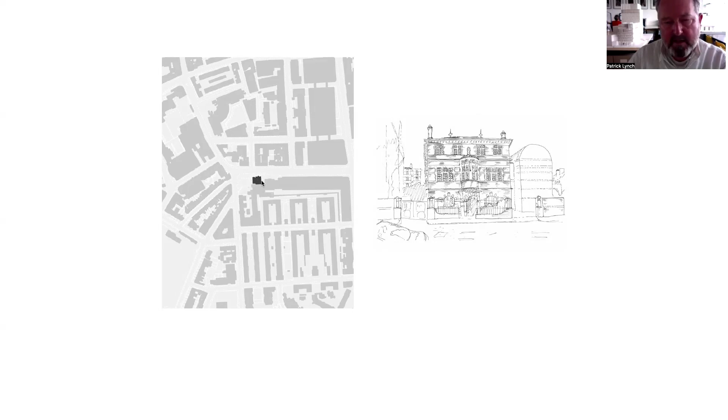Previously, horses and carts would drop off bodies and they would go around like that as a turning circle because horses aren't very good at reversing, obviously. And that original use was changed when they built the mortuary, and so these pieces of land either side of it became redundant, if you like. And that's the 90s building.

This is the early 1900s Coroner's Court. Has a kind of funny character. Rykwert once told me that he thought it was a bit Beatrix Potter-like. It was kind of straining to be homely and serious. So I think you could take a very generous view and say that actually it's incredibly empathetic and thoughtful. There's a very intimate scale of entrance. This window seat at first floor.

It was quasi-domestic as well, because in the 19th century, if there was a suspicious death, if they thought you had cholera or TB, and somebody died in your house, you would be housed here on the top floor whilst they fumigated your property. This is the original Victorian courthouse. It's kind of secular sacred, as Peter Carl would say. I think you would appreciate its use in this context,

whereby there's barrel vaulting, there's light from above, there's a dais. Everything's made of good, noble but not ostentatious materials. It's very like a church and a theatre in the sense that it's a ritual, it's a public ceremony.

You stand up when the coroner enters. They enter from a vestry or small room to the side. When they don the gown, they become an agent of the state. They embody the justice of the king or queen.

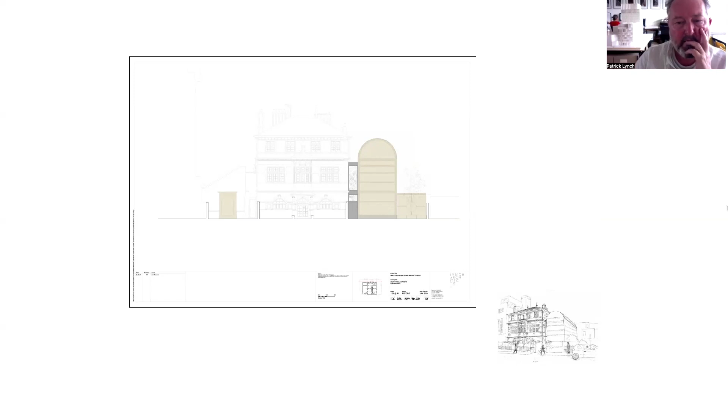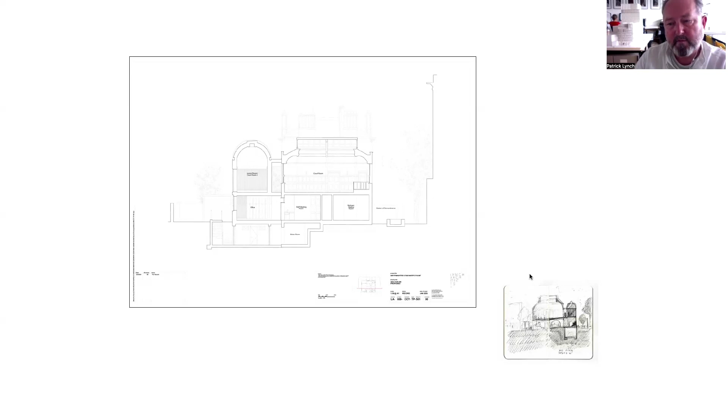And that this motif of the arch, or the little house, the aedicule, could give us a way to deal both with the Garden of Remembrance and the new building in a way where the spatial typology and the poetics of architectural character of these rooms, of upstanding rooms lined in timber, top lit, with the vault there to focus the voice and focus the attention upon the judgment of the coroner, could be the clue to how we might make a new architecture. There's a sketch section through the two courtrooms.

This building's made of CLT and clad in Jura limestone. The striation of the limestone, Portland stone of the original building, continues across, giving it a sense of scale. But there are no windows to the north and to the street. Behind this wall is a room for the bereaved families, and here is a witness and evidence room. So highly, highly secretive activities, if you will, requiring huge amounts of circumspection and security.

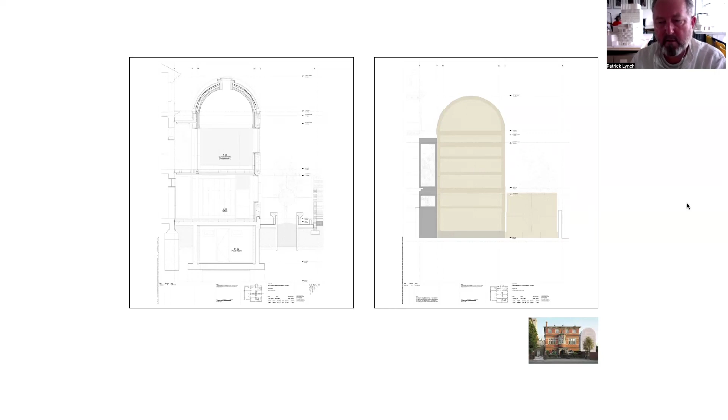So the way the plan works is you come in here, if you're called by the police in the middle of the night, you walk through the centre of the plan into the mortuary, and you enter the viewing room where you witness and identify the body of a loved one. You then go, if you wish, into the Garden of Remembrance and have a cigarette or a swig of something sustaining that the policemen carry with them. You go away for a few weeks or months, depending on the complexity of the case. If you return, you come in here.

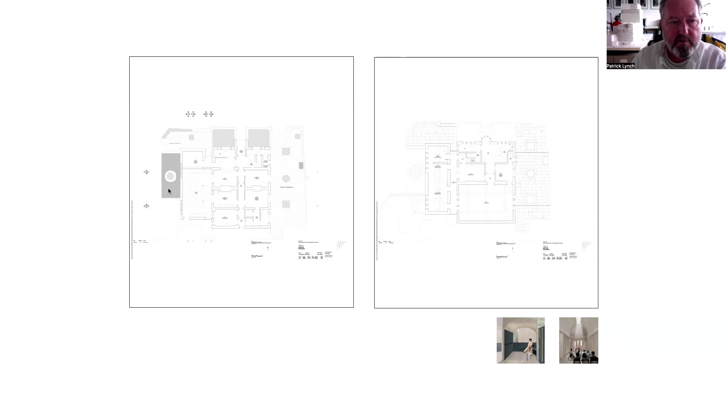We've opened up a new opening to create a reception desk, and you would go into the waiting room with its own garden of reflection with a pond. Here is new accommodation for the coroner service staff, a kitchen for them, a receptionist, room for the press, toilets, and more waiting rooms. A grand stair takes you up to the first floor, and then into the old Victorian courtroom via the window seat I mentioned, which I think is a hugely sympathetic and empathetic act of bodily architectural furniture. Knowing that people need to sit down, they're probably in tears if they found out that somebody's committed suicide and thus they've no inheritance and they can't be buried on consecrated ground, etc.

They're really very good architectural kind of spatial scale happening here, in contrast to then the large vaulted room. If you're going into the second courtroom, you would come in here. So the coroner, that's the coroner's dressing room, their office there, the toilet, WC.

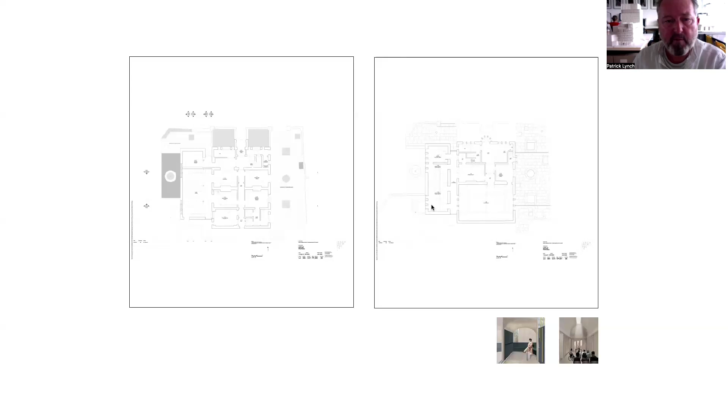They parade like a priest or an actor to the back of the stage, the dais. Similarly, in this condition, if you're a jury member, you would be here. Or if the second court is in session, the evidence room becomes a robing room for the second coroner, and he perambulates down the corridor and enters behind his desk or the stage or the altar, if you will. So it's highly theatrical. There's very much a front of house and a back of house character.

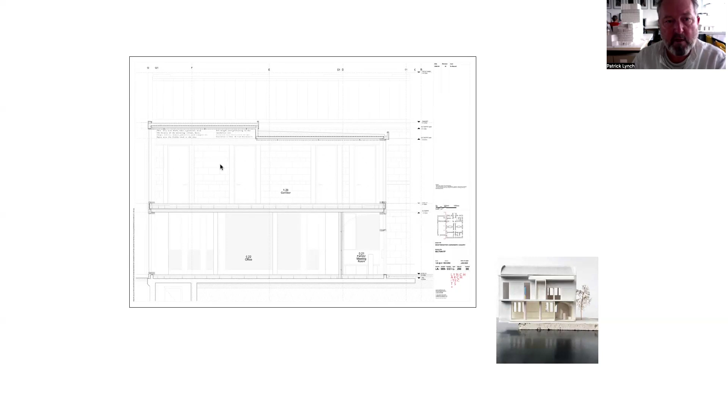The corridor itself, the glazed link corridor between the two structures, which is here in plan, steps. It's lower at the front to be lower than the cornice of the original Victorian building, and it steps higher here because the internal facade of the Coroner's Court has very large windows. And so in section, as you're moving through the plan, it naturally guides you to the left, if you're a member of the public, because that's where the space gets taller. It can be subdivided into a small juror's room or large juror's room, or opened into a much bigger space.

This is the west elevation, which, because nothing will ever be built there, will always benefit from lots of light. So there's windows on that elevation, not to the north. And to the south, there's a problem with you're just looking onto refrigerating chillers above the mortuary. So the building's symmetrical, but its setting in the city isn't. So you have a long approach from the north, where the new building, as it were, has its own presence.

This aedicular motif is typical of Victorian architecture. Even within a Baptist church, there's a strong sense of bodily scale rising to become the architecture. So in essence, this is a kind of genius loci project. It's the elements of the original building and neighbouring buildings condensed into an experience of similarity, of rhythm, of scale, of similarity.